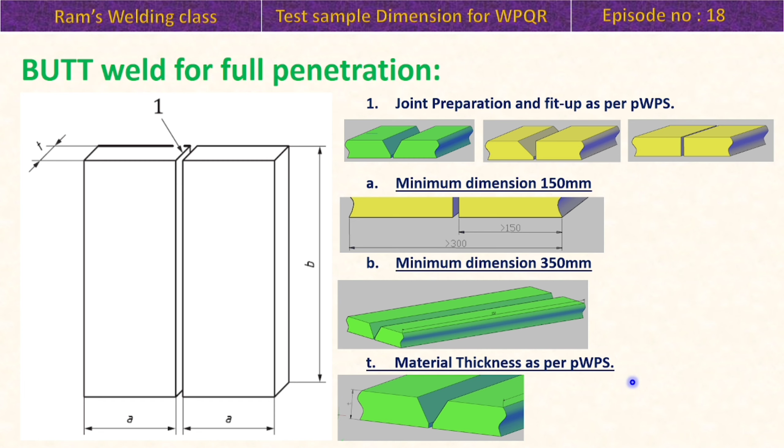So this T is decided by the PWPS, and the PWPS is derived from the drawing, what actually you need it for, and what range of qualification is needed, so T is dependent on that. So if you need to qualify a 10 mm plate and 15 mm plate or 20 mm plate, and you want to club a single WPS, the thickness should be decided so that 10 mm and 20 mm are also covered in the range.

So now why the width is 150 or more for a single side. So here you can see one side is 150 and this one also 150. One sample is 150, second sample is also 150, so total is 300. So why is 300 needed?

Now see, when we do the transverse tensile test, transverse means the weld is in the middle with base metal on both sides. In the tensile testing machines, we need the length to be more than 200 mm to grip the two ends of the test piece. So that's why the length should be minimum 300, so that it will be easy for the tensile test specimen.

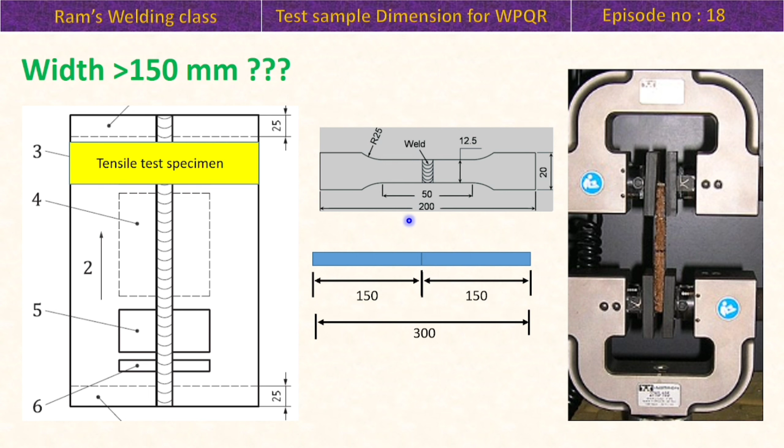And why is the length 350 or more? There are many types of tests carried out on a single test piece. For example, tensile, bend test, impact test, macro, hardness. Now see the locations where the test samples are derived from a weld joint. You know that from both sides 25 will be discarded.

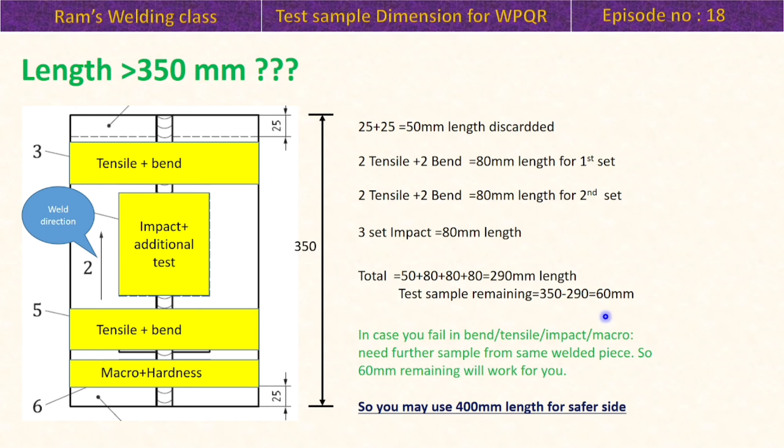So two tensile, two bend specimens need 80 mm length. Again two tensile, two bend need 80 mm, so 160 mm, and three sets of impact test require 80 mm. So total is 290 mm, only 60 mm is left. So if there is a failure in a test specimen, what happens? You do not have sufficient material to carry out extra samples. That's why if you take the sample 350 or more, then you are on the safer side to make extra test samples.

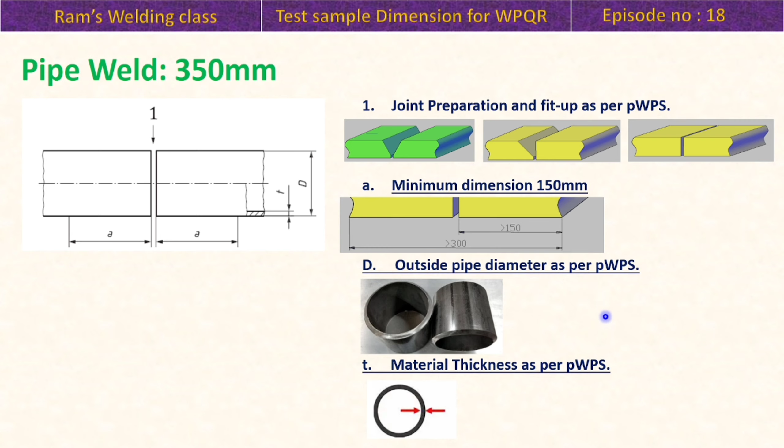So this is the simple test dimension explanation from my end.

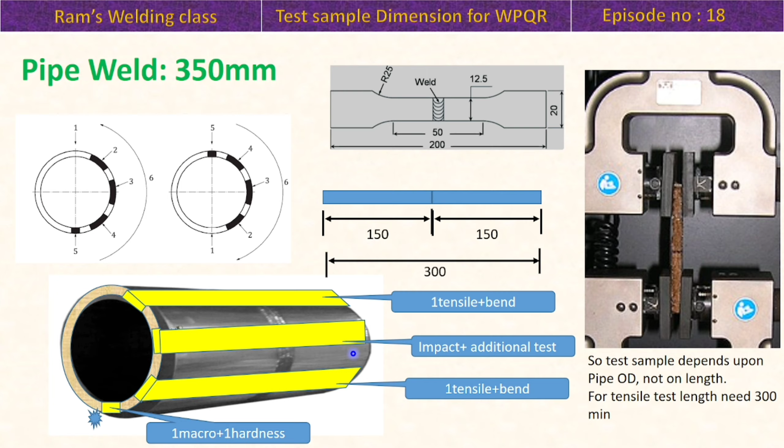So here the length of 350 is not mandatory, but as per the standards the welder needs to do a complete length of 350 mm to show the joint quality. So these are the test dimensions for the butt weld, pipe weld and the fillet weld.